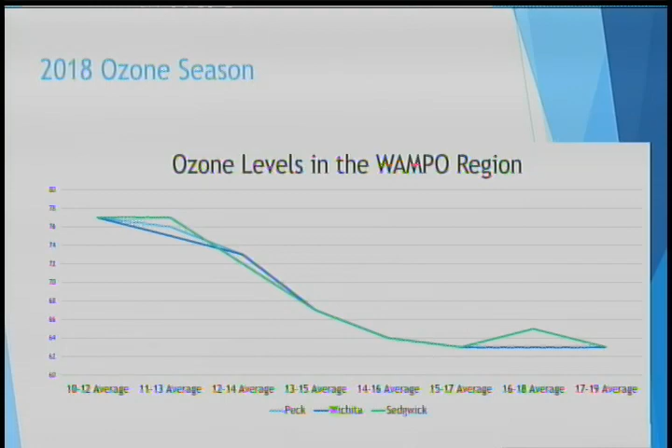I feel safe saying the only way we would get into trouble is either a substantial increase in ozone pollution in our region, or if the federal government were to make the standard stricter, which is a possibility—they did do that 5 years ago. Any questions? I don't see any questions. Thank you, Chris, appreciate it. Thank you.

Thank you, Chairman. Next item on our agenda is the consent agenda, and we have 1, 2, 3, 4, 6 items on the consent agenda. Move to approve consent agenda. Do we have a second? Kelly Arnold. Any discussion? Seeing none, all in favor say aye. Opposed, same sign. Motion passes.

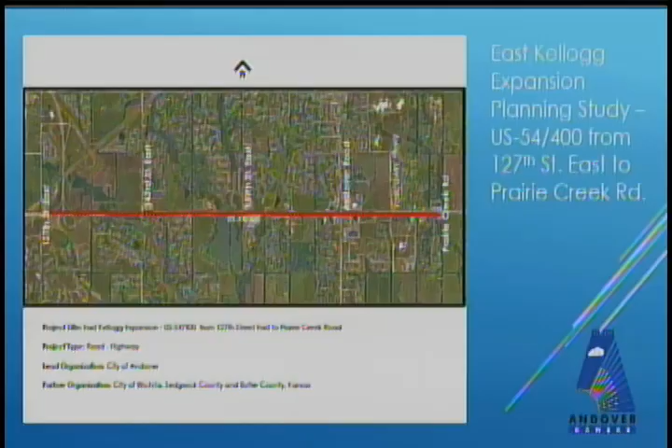The project I'm here to talk about is East Highway 54, that freeway has recently opened to K96 and extends out beyond Andover. One of the things most folks probably don't know is that there are numerous studies out there on this corridor that have been going on over the last 10 plus years, because we all realize that as these freeway improvements extend further east, we just kick the can down the road. That bottleneck that occurred at Rock Road 20 years ago has now been kicked down the road to 143rd Street.

We think this is probably the most significant east-west corridor in south central Kansas. If you look at the numbers, it's interesting that the volumes on Highway 54 are actually higher than Interstate 70, all the way from Topeka west -- nearly double those volumes. There are a lot of trucks, 2,000 trucks a day if you use a 5% value. The 2040 estimate is 85,000 vehicles per day, so just about double what it is today.

Some statistics on workers: there are something like 8,000 workers who commute back and forth, 5,000 of those from Butler County into Wichita for work, and another 3,000 who come from Wichita back out to Butler County for work, as well as about 4,000 students a day, both at Butler Community College and the Andover USD 385.

There are some interesting consequences of that freeway opening up to 143rd Street. If you've traveled out there today -- well, let's say a month ago -- you would know that the intersection at 143rd Street had failed. Traffic backs up in the afternoon beyond K96 such that traffic off of K96 can't get onto eastbound Highway 54. With the opening of the freeway and the future improvements, that condition gets worse. It will get to the point where there will be over a 220-second delay at 143rd Street because of the freeway and that unrestricted condition.

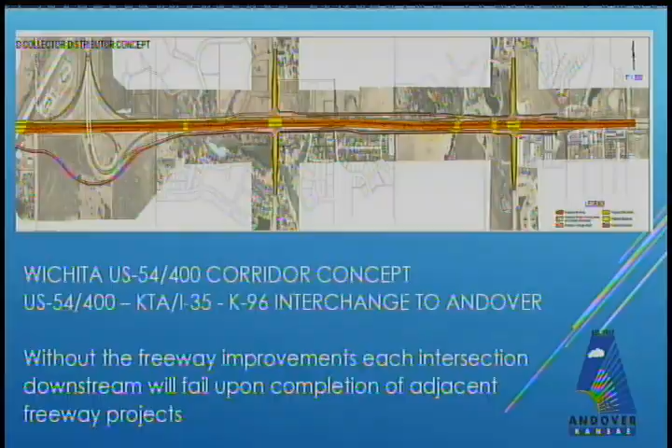Just a few slides here on potential concepts. One thing that I really want to drive home is that this is nearly $500 million worth of improvements if the freeway is built all the way from K96 to east of Andover.

We all know that funding a $500 million project is something we can't take on in one step. So this planning study would help us look at if this work could be broken up into phases. We've done that all across town. I was telling David Spear I worked on Highway 54 at West Street back in 1985, building the first freeway bridge. That can has been kicked down the road for the last 30 plus years. So it's important for us to study the corridor and see if there's a way to divide it into phases that are logical and don't just continue kicking the problem further east.

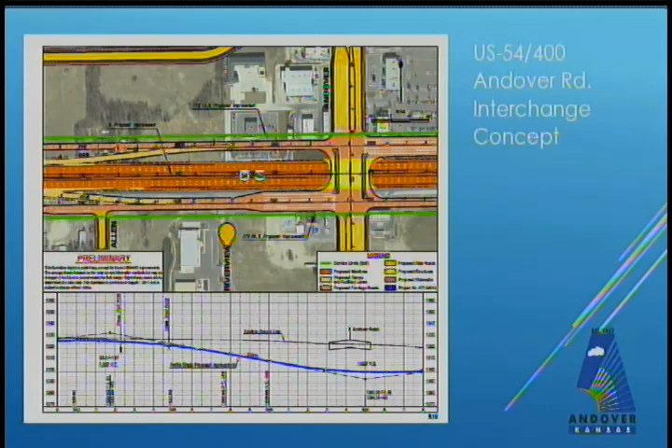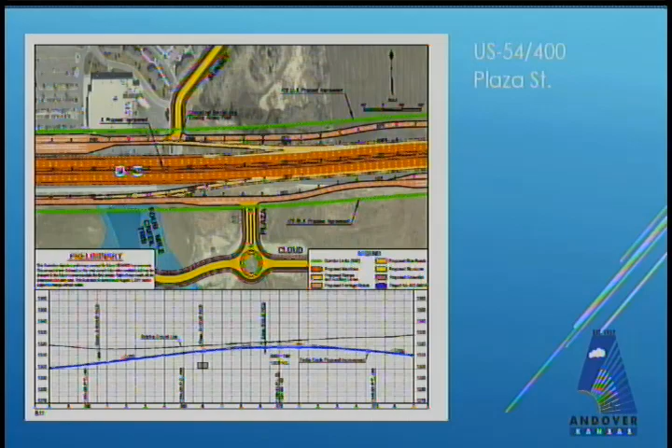Again, the City of Andover did a study. Here are some of the concepts from that study, what US 54 would look like. We project that 54 would go under Andover Road, and the profile might come out of the ground as it travels east at specific locations until it hits Prairie Creek Road on the east side of Andover, where it would again have to be elevated because of floodplain.

Part of the MTP was to analyze the outcomes of the project. Safety and health - we all know that a freeway would reduce accidents. It would improve air quality because those cars aren't stopped every mile at a traffic light idling. And it would allow us to build in some bike ped crossings.

That's been a priority in Andover, bike ped. Every arterial street project we do, we build a 10-foot bike ped sidewalk and a 5-foot pedestrian sidewalk on the opposite side. Today, all of those projects come up to Kellogg, and I call it Frogger. If a person is brave enough, they can walk or ride a bicycle across Highway 54, but I certainly wouldn't advise it. I doubt that any of you would.

Another outcome has been an integrated multimodal transportation network. Again, bike ped crossings are very important. Enhanced freight movement - 2,000 loads of freight a day come through that intersection at US 54 and Andover Road. Enhancing that commuter route for a lot of reasons.

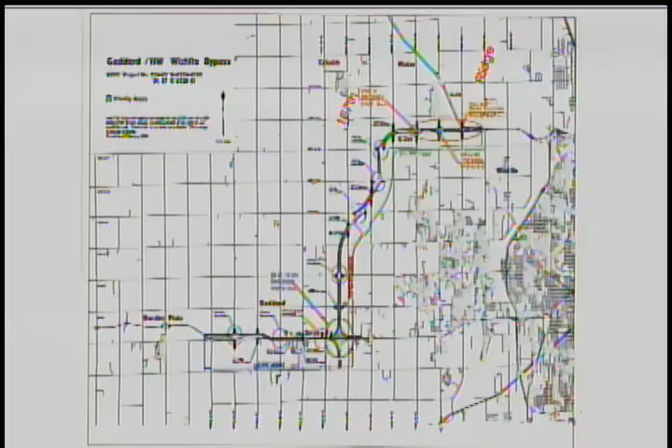There's the route of the bypass, or some people call it the Northwest Expressway. You can see it ties into 96 up at the north end, just north and east of Maize, comes around, down, and ties back into Kellogg at the south end between 167th and 183rd.

It's been split into 3 different projects now instead of one, because like Les was talking about, it costs so much money you can't afford to do it all in one. The whole thing is about $520 million. You can see the green part, then the red part, then the blue part. The green part starts at the north end at K96, or junctions with that, and comes down to somewhere between 13th and 21st, past the hospital that's out there now.

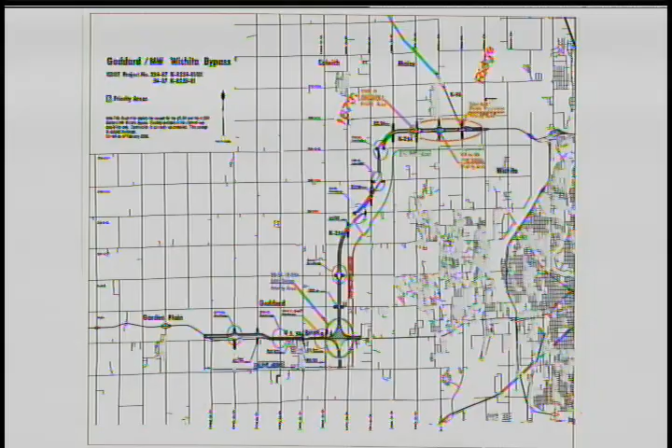On history: in 1997 KDOT began the formal study on this project. From 2001 to 2005 we had initial public involvement with informational meetings, several of them across the county. In 2006 we selected the preferred alternative and presented it to the public.

You need to know that all the environmental clearances have been approved, and the project has been designed through the field check stage. In 2006, acquisition begins for the right-of-way, and of course KDOT is in charge of that, but we have local partners helping. In 2007, Sedgwick County established the Corridor Preservation Plan Overlay District, a protective overlay. As far as I know, no other place in the state has done that. We put a protective overlay over the entire route so no one can build in there. I'll talk a little more about that as we go on.

Project highlights and cost - this is pretty significant. It includes a major drainage detention facility on Dry Creek to protect a subdivision or subdivisions in northwest Wichita. When we had the Halloween flood of 1998, it flooded Breezy Point. After that, the county and city of Wichita entered into an agreement with Black and Veatch, and they came up with several different things across the county to help prevent flooding, and one of them was this.

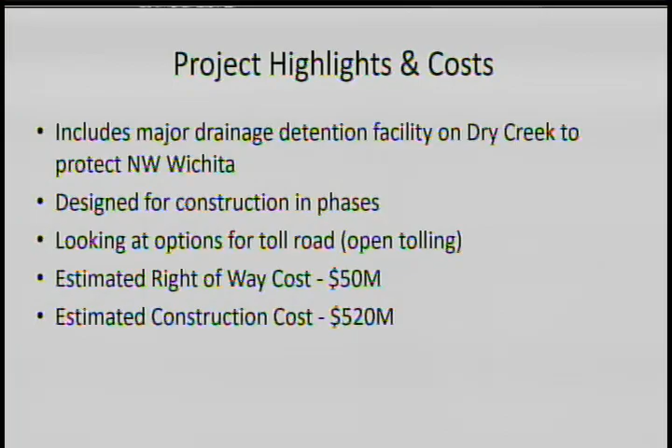So, a little status report on right-of-way. Through now, $23.2 million has been spent. You can see the breakdown: 2006 to 2010 was 14.4, 2011 to 15 was 5.5, and 16 to 20 was 3.3, and that adds up to the 23.2.

We've met with KDOT. We're working on a new 5-year agreement with them, probably get that signed next June or July. That one will be $500,000 local, $500,000 KDOT, so $1 million a year. Still probably have about $30 million worth to buy, so that'd be 30 more years unless something improves. Of course, we could concentrate the money on the north end, that first part, and maybe get that right-of-way first and go ahead and get that started.

But you can see the total right-of-way required for the whole job is 1,334 acres. That's a lot of land. Total right-of-way acquired to date is 470 acres.

Another innovation we did was this protective overlay I talked about a little while ago, and we established that in county zoning code in 2007. So what happens is if development activity is detected within that corridor, we notify KDOT. Also, if somebody wants to just build a house in there, that goes to MABCD. They contact us, we contact KDOT. KDOT talks to those folks and determines if it makes sense to go ahead and buy that right-of-way. Most of the time it does. It's going to get the right-of-way cheaper before somebody builds in it, and that's the whole point.

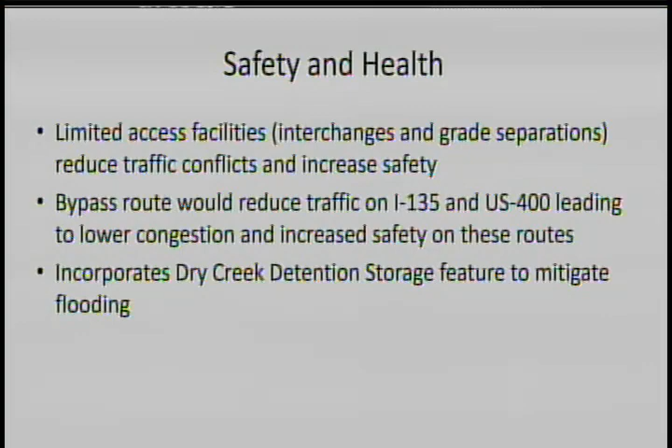It incorporates a dry creek detention storage feature to mitigate flooding. I think that outlines all of that.

Then expanding the economy through mobility: construction of the Northeast Expressway spurred significant growth in Northeast Wichita, which has expanded into adjacent cities. We believe this will mirror the Northeast Expressway. It's reasonable to think that similar expansion will happen when the Northwest Bypass is constructed. I'm going to have something pretty special at the end of this PowerPoint, if it works, to show you what's happened over on the Northeast Expressway. Major investments have already occurred in the St. Teresa Hospital, the YMCA, and the Maize and Goddard developments.

Integrated multimodal transportation network: integrated networks require robust interstate-level backbone infrastructure to carry freight and passenger vehicles safely through and around the region. The Northwest Bypass would increase efficiency of traffic moving from Northeast Kansas to Southwest Kansas and beyond, and vice versa.

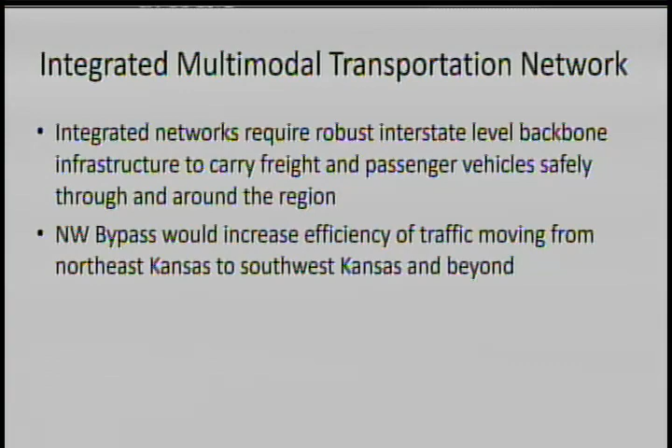Expanding the economy through quality of place to attract and retain talent, the WAMPO region enjoys low congestion and travel delays. Planning for this interstate-level route provides a tool to ensure that commute times and travel delays remain at a minimum. Reliable commute times are an important asset for workforce attraction and retention. I think I've seen somewhere, and somebody here probably knows more about that than me, that the average commute time in this area is less than 20 minutes to get from home to work.

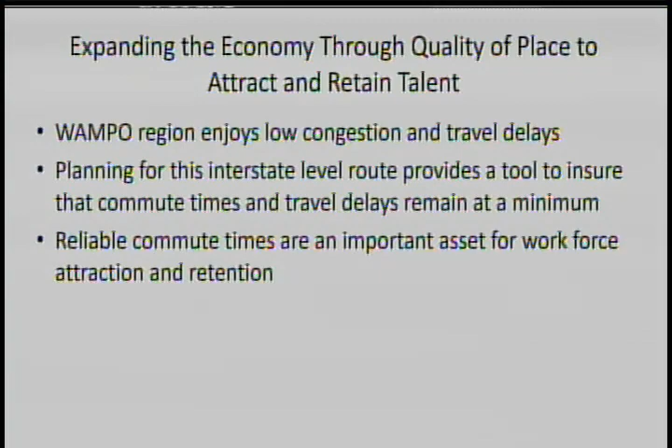I want to show you the city limits. You see there up on the top, Maize, Wichita down the center, and I don't know what color, it's a gray color, and then Goddard down below. You can see Wichita is moving out to the west, getting closer and closer to where the alignment is going to be. It already goes through Maize.

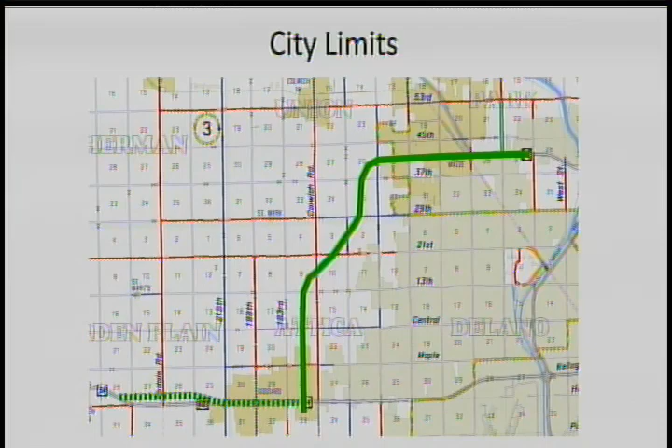One of the things about the protective overlay is that when a city annexes that land where the protective overlay is, they do not have to follow that guideline anymore. They can allow development in there. What we try to do is work with them so that they don't put any in there. But the pressure will increase over time from developers to go ahead and develop this property, and that would not be a good thing.

Okay, now we'll see if this works. Whoops. Oh. Can you start it moving? Oh, you gotta get right on that. Press it. Yeah, I don't know why. It's going, it's going. It's not up there though, for them. Oh. Uh-oh. I know.

Sometimes I get these wild ideas and they don't work on PowerPoints. What I'm trying to do is show time-lapse photography from before the Northeast Expressway was put in to now, and show you the development that occurred along there in all these years.

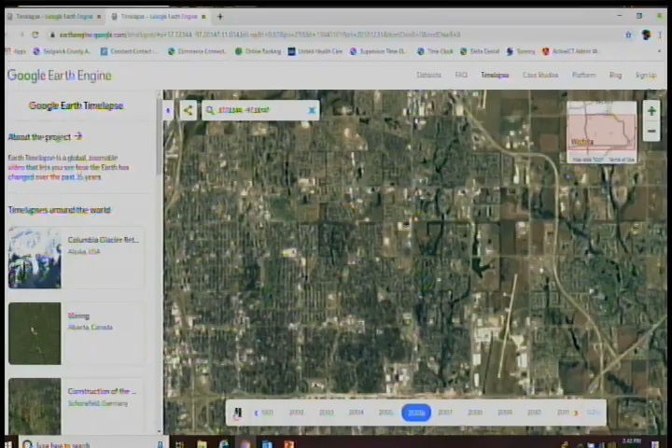Well, that's why we say history repeats itself. We think the same thing will happen out west. We don't know why it wouldn't. So all these projects are deserving. We just got more projects than we do money. I mean, East Kellogg's deserving, West Kellogg's deserving, this is deserving.

This one will give you more tax base though. No, just kidding. Sorry. That's all right. The others are far ahead of this one. So anyway, that's it. Let's leave that alone, I guess. Any questions?

Go ahead. Actually, more of a comment on when you were talking about the WAMPO MTP outcomes hitting 4 out of 5. I was a little surprised why you're not taking some credit for the equity, because if you're going to achieve safety and health benefits and take freight off the local roads, get it off the arterials, you're helping the health of the community, why not count that as a benefit? Because you're helping the overall community from that perspective. You talk about quality of place being improvement and attraction and retention. If that community has less traffic in there and the freight's being diverted, why wouldn't that be a benefit?

It would be. You're the preacher talking to the choir, so I'm okay with that. Just a suggestion. That's right, that's exactly right. At least maybe an indirect benefit. Right, just didn't want to take everything too far, but that is correct.

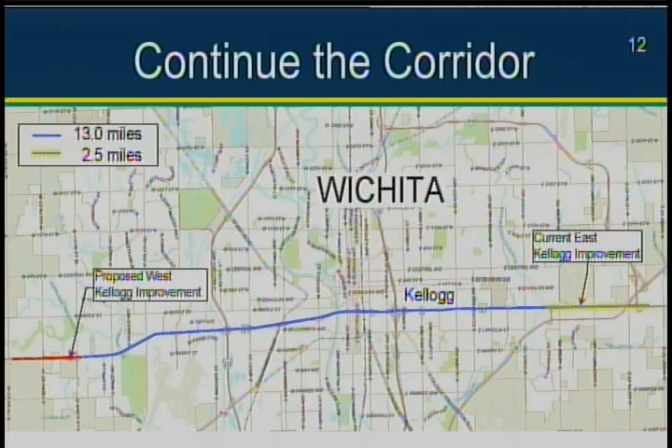As you can see from this map, the sections of Kellogg that have been completed are shown. There's roughly 13 miles in blue that goes from Trigg to 111th. Trigg is just west of the turnpike out east—if you don't know it, it's a small street, so you can almost say Webb Road. The section in yellow is the 2.5 miles currently under construction out east. The red on the left side of the map is the section of West Kellogg we're going to talk about today, which is roughly 2 miles.

This shows an aerial map of what's been built. You can see the frontage road—the mainline improvements stop at about 111th. So it's a 6-lane freeway back to the east, and a 4-lane expressway with at-grade crossings at the arterial streets, or the 1-mile section line roads. We've built a number of frontage roads as part of this project. You can see the frontage road on the south side has been built, and a section on the north side between 135th and 151st was built.

We recently took the signal out at 111th. At Maize Road, mainline Kellogg goes over—it comes over a crest. There was a signal at 111th, and due to the proximity we saw a number of accidents there. So we looked at different strategies or options of what we could do.

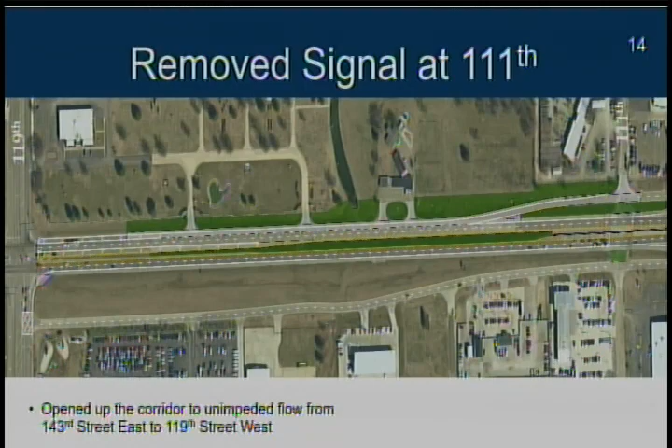One option was to take the signal out and put a slip ramp in that area. So we did a project and worked with KDOT to get this approved. Now the left turn lane for westbound traffic becomes a spot where you can make a U-turn at the intersection of 119th, and some pavement was added there so bigger vehicles could do that.

This just shows what the proposed configuration looks like. The orange is mainline pavement. At 119th, the mainline goes over—up and over. At 135th, it goes underneath.

Ideally, you would build the two at the same time. It doesn't have to be done that way, but that allows you to take dirt from digging the hole at 135th and bring it to 119th to make the mound where you have retaining walls leading up to the improvements. Again, everything shown here in green has already been built, so you can see a number of the frontage roads are already there.

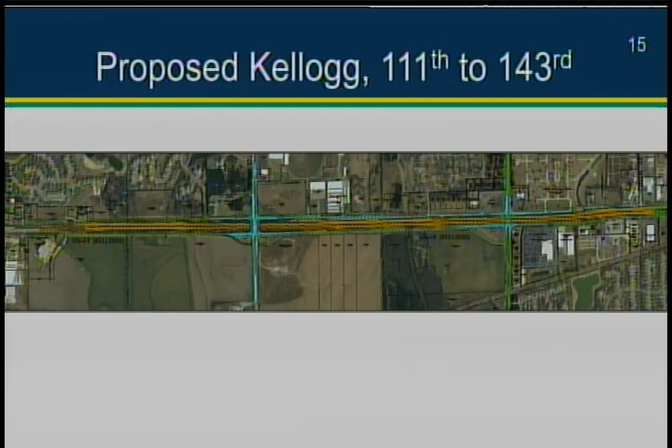The design for this project is all but complete. We will look at completing it this year, in 2020. Right-of-way has been acquired, and all of the utilities have been relocated except between 135th and 119th.

I'll talk a little bit about this. This is a zoomed in picture of 119th. Again, you can see the orange going over the top. It's fairly standard. This will look very similar to what you see at Maize.

You'll have the Texas U-turn. We have to build the frontage roads straight through there on the south side. You can see the existing is what's there now. Because it's not a grade crossing, we're trying to pull that away so you can actually make that movement when there's a considerable amount of traffic in that area.

You can see looking at this, there's a considerable offset starting here. There were a number of reasons that was done. Part of it was the cemetery you see here on the screen. So that alignment is actually shifting south. That's a big part of the reason the frontage road on the north side between, well, more or less 111th to 135th hasn't been built at this point. This bridge you can see over here, that's the frontage road, and that is actually the mainline bridge for westbound Kellogg right now.

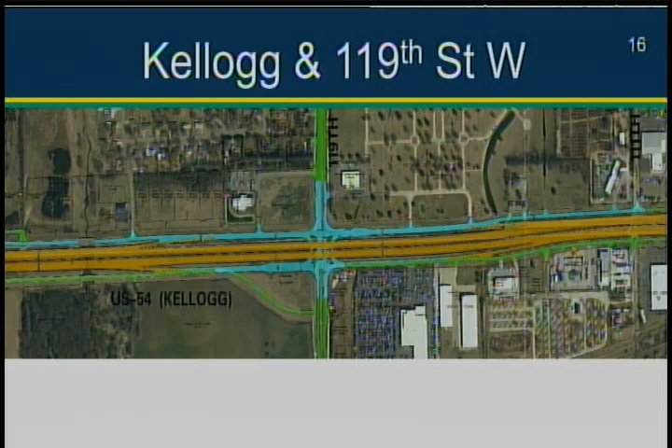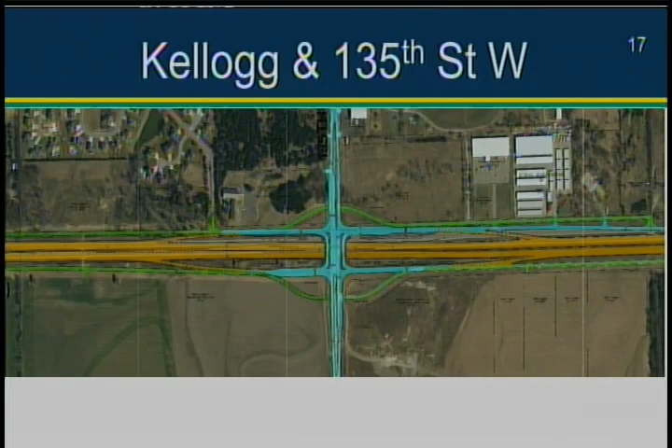135th, like I said, goes underneath. So this will be very similar to what you see at Webb Road out east. Again, you have to build the frontage road straight through. The bulb out will go away. You have to do some reconfiguration on the arterial streets, and we still have to build the frontage road there on the north side of Kellogg, east of 135th.

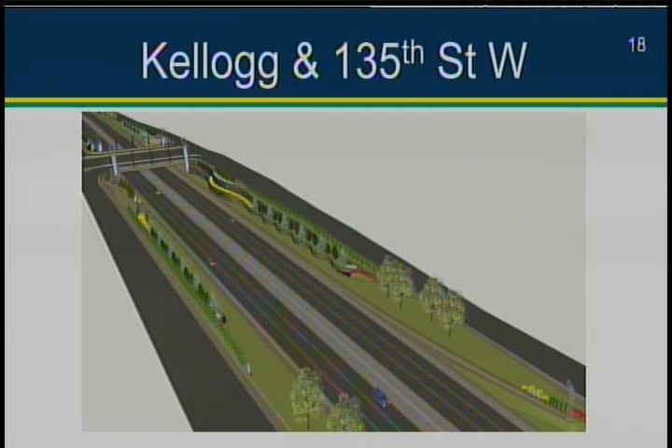Talk a little bit about what it's going to look like. This is just to give you an idea of what the aesthetics are going to look like at 135th. You have some terraced retaining walls with landscaping. You also have some artistic designs on the bridge to give it a little better look than just a standalone bridge. That's zoomed in, you can kind of see the artistic rendering there.

119th looks very similar to Maize as far as the abutment walls, the piers and stuff will have a form liner to go along with them, and it'll have a raised planter on the outside of the retaining wall. Like I said, this project is getting very close to being complete as far as design goes. The right-of-way has been acquired, and most of the utilities have been relocated.

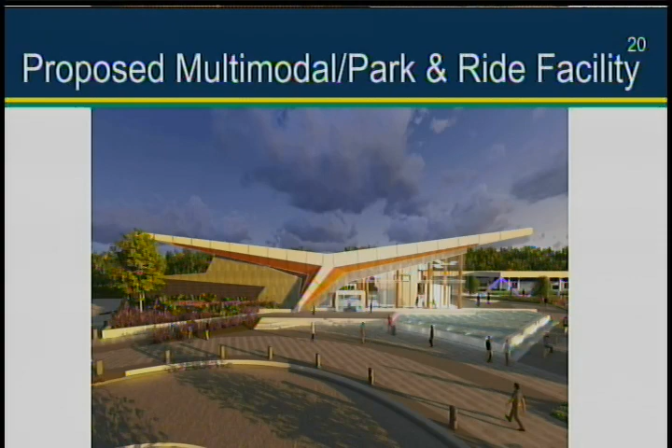Another thing with this is Wichita Transit is currently looking at park and ride facilities both out east and out west. The one out west, they're looking at a potential location at 135th and Kellogg. So you could drive your vehicle there, park, get on a bus, and come downtown, go wherever it is you want to go. With this project, that would connect you Freeway from that facility.

I don't want to talk too much about the different criteria that it hits because it's more or less the same as the other projects as far as development, as far as health and safety. 135th has a 10-foot wide path all the way from Kellogg. When we're done, we'll have it all the way up to 21st. Right now there's a gap between Central and 13th. 119th has a sidewalk and path on the south side. So it hits all those criteria just like the other projects. The estimated cost of this project, because we've already completed a considerable amount of it, is only about $85 million.

And with that, I'll open up to any questions you have.

We have any questions? A couple of comments on this one also. It goes into my district, so I'm very familiar with this project also. But a couple points: the last time that anything was done on Kellogg going west, Bob Martz, who some of you are too young to even remember, was the city councilman for the city of Wichita. He did the ribbon cutting of the project we see right now that went out to about 111th Street. That was a long time ago. And right now, Goddard's growing up, everything west is growing. It's time that we start concentrating a little bit more on going west.